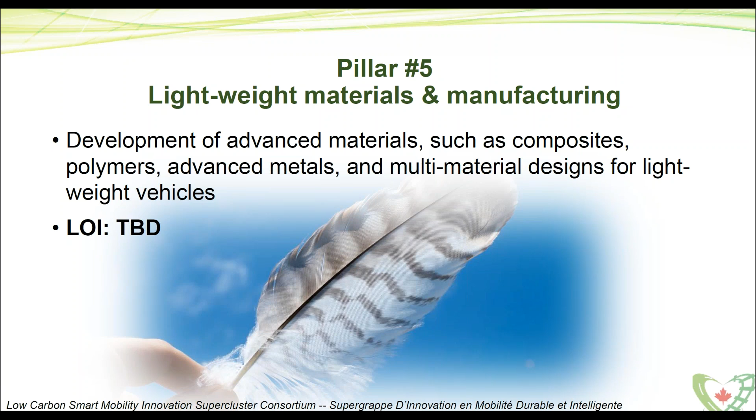Now, for those of you familiar with CUTRIC, what we've been battling at the federal level, in a positive way, is the fragmentation of funding. Currently, we have projects coming through the CUTRIC pipeline in Ontario and Quebec, and some in Alberta and British Columbia as well, that we try to shove through federal programming. And the vast majority of federal programming is not ideally organized or coordinated for low-carbon smart mobility tech.

So what's happened is we've gotten projects that have gotten ASIP funding or SDTC funding, and then they come to the CUTRIC fold for additional funding to grow in a particular provincial landscape. And that works, but it's just not the most efficient way to get projects out the door. It definitely takes more time than it should. And none of these programs is designed for transit applications, including PTIF.

So PTIF, which is public transit infrastructure funding, both phase 1 and what is probably going to be phase 2, were not designed for innovation projects. They were designed for procurement of off-the-shelf commercial products. So your kind of Canadian Tire version of a commercialized product. And yet what we do really is on the integration and innovation side, and the PTIF phase 1 money was not designed to support innovation projects.

So we hit a wall even in Infrastructure Canada, which is presumably dedicated to transit applications. And that's not a surprising wall. I mean, at the end of the day, for the last 15 years, we haven't had a federal mandate for low carbon smart mobility tech on the innovation side. So it's not surprising the federal landscape is fragmented, which has resulted in our lobby effort over the last 2 years.

And at the top, you'll see there that we put in this year into the federal budget, we requested $185 million over 4 years because we had that many projects coming through that needed federal matching, where it was not a perfect NSERC fit or SDTC or ASIP, or it was a combination of the two, or it would have taken way too long to have gone through one of those portals and then have obtained provincial funding.

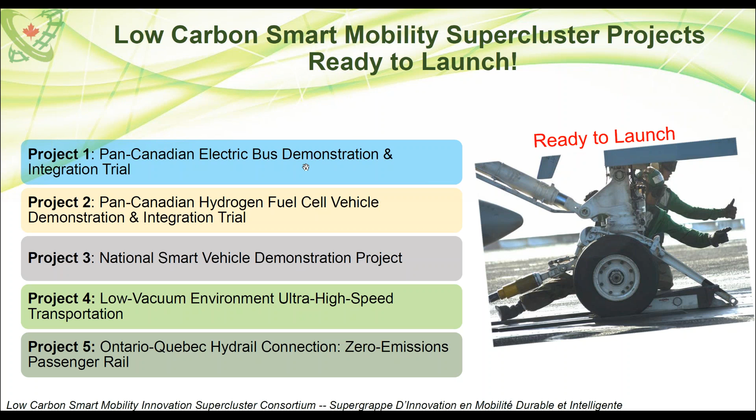It is necessary work, it has to happen, but that is why Consortium is a good structure for this kind of work. A straightforward funding body that receives money from government and then redistributes the money through a call for proposals, let's say, isn't able to do this kind of consortium-based project development work. So consortia really do create the capacity to create knowledge that then allow for the political lobbying that creates the funds for the technology play. Hopefully that makes sense. It's a bit of a convoluted story, but that is the reality of how these projects come about. So I'll take you through the Pan-Canadian Electric Bus Project.

This is a project started about 16 months ago where we reached out to transit agencies and manufacturers to figure out what the problem was. If there's no problems, then everybody would have electric buses right now. There's an obvious environmental check next to it. It fits a lot of mandates around GHG reductions. So why aren't all our transit agencies going to electric buses if there's no problems?

And we found out, of course, there are loads of challenges, and challenges associated with misunderstanding, lack of information, sales pitches versus actual empirical data. So just loads of issues that have to be resolved. Some of them are highlighted here: the need for high uptime, demand charge problems, precision driver problems, renewable energy slumps during the day that make it hard to identify exactly when it's best to collect and harvest energy off the grid for transit, and then of course recycling fees.

So we started off with a project that looked at standardization as the core focal point. And in phase one of our project, we look at standardizing the overhead charger with the bus by virtue of integrating multiple competitive manufacturers. And then we have the integration of energy storage in phase two and the integration of automated charging episodes in phase three. In phase one, these are all the stakeholders that are part of phase one of the trial. This, as I said, is taking 16 months.

We used to have 7 transit agencies involved. And just to speak to the politics of it, 4 transit agencies fell off as we went through municipal councils. So municipal councils sometimes don't believe in climate change. Sometimes they do, but they don't believe in spending money on high-cost projects. Sometimes they do believe in spending money, but they don't want to be the first to absorb this technology.

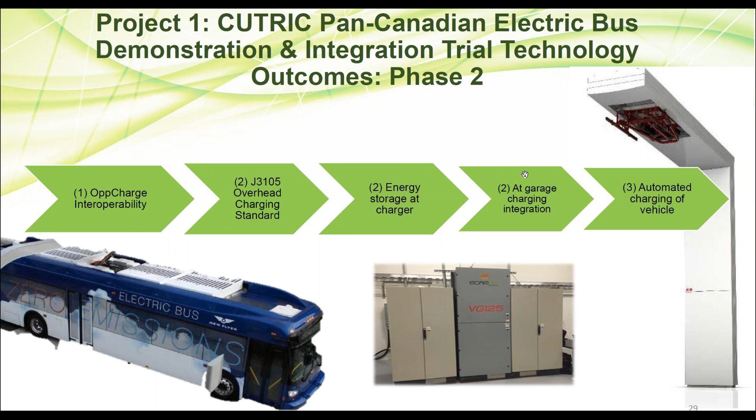With phase 2, these are currently the systems that have identified interest, systems as well as companies. So here are all the utilities that have put up their hand to say they want to co-invest. Here are all the transit agencies that have said they want to absorb these technologies, and now that somebody has been first in phase 1, they're ready to be second. And then, of course, our manufacturers at the table.

In phase 2, an interesting development is that BAE is going to be developing a plug-in hybrid electric powertrain that would plug into the standardized overhead charging system in competition with the TM4-led Canadian collaboration with Cummins as a diesel engine maker for an equivalent powertrain that would be a plug-in hybrid system. And so we have a direct competition between BAE and the TM4 Cummins partnership, which is really exciting for transit agencies as well as manufacturers to be able to look at more than one supplier.

And if you've been playing in the transit domain, you know that it is governed by monopolies, and the electrification of transit is really breaking up those monopolies. So our project will be launching with the goal expected to get to 40 electric and plug-in hybrid electric buses across at least 6 transit jurisdictions, with a likely number of 15 overhead chargers. The energy storage devices will be a combination of battery and potentially flywheel that has yet to be determined through our technical planning sessions.

Just to summarize before I show you the modeling on the electric bus one, we also have some other marquee projects going into the Supercluster bid. One is our hydrogen fuel cell demonstration and integration trial. Technical planning for this is starting on Monday in Winnipeg. We are starting off with a major transit play, trying to get to 30 hydrogen fuel cell buses in at least 2 jurisdictions, likely Ontario and Quebec or Ontario, Manitoba, integrating multiple methods for producing hydrogen, and then patching on top of that in the future a Toyota fuel cell vehicle leasing program.

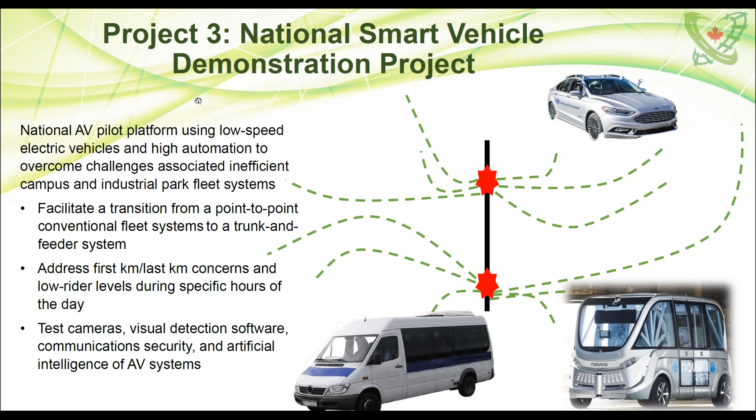Project 3 is a national smart vehicle demo project. Here we went across the country to figure out who's doing what in automated vehicle technology, and we found there are loads of cities trying to do something in autonomous vehicles. Some of them are trying to launch on-road demo pilots, but it's up to a municipal department to try and find the right manufacturers and software providers. In other cases, we have sites that are led by industry, like in Montreal, ABB and FP Innovations, in Ottawa being led by BlackBerry QNX, in Quebec City by Thales.

And so in the cases where it's led by a company, of course, there's the self-interest of that company coming to the forefront in terms of owning IP, and that's good for the local economy, but it's not necessarily good for achieving standardization, not only across municipalities, but across Canada and North America. So again, what we did was we called together a lot of these municipalities, a lot of the companies, over 40 companies that we interviewed and then brought together in a first technical planning session in Toronto.

The second session's in August at PMG test facilities in Blainville in Quebec, and the third technical planning session will be in Edmonton in the fall. And over the course of 10 technical planning sessions, we will get to a full scoping, budget, and set of common deliverables across. The goal right now is 5 municipalities.

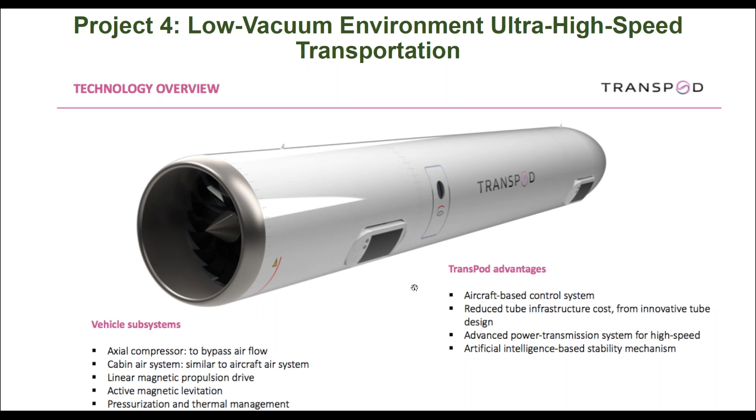In terms of futuristic thinking, we've incorporated into our supercluster bid a Hyperloop competition with Transpod. So this company is coming in at several tens of millions of dollars into our supercluster bid to launch what would be a major infrastructure play for a Hyperloop demonstration in Canada, likely in the Ottawa or in the Ontario-Quebec corridor. And then we've incorporated Hydrail as well, with Hydrogenics being one of the leading companies on that kind of initiative. But of course, we're integrating additional hydrogen-oriented innovators.

So now I'm not going to spend too much time on our national alliances. Just to let you know, we're building up our national alliances with provincially footprinted organizations to make sure we've brought in all the technical capacities across all the fragmented provinces.

And then we do have a First Nations policy where we are looking right now at working with First Nations communities, in particular likely in Thunder Bay and then in British Columbia, in order to be able to offer pilots and demonstrations of safe, secure, low carbon and connected mobility for people, in order to ensure that in particular young people and women have access to safe and secure mobility from First Nations communities into cities and across First Nations communities. And we all know, especially from the news lately, that this is a life and death question.

There are serious sexual violence issues, very serious death issues, and very challenging quality of life issues for a lot of our First Nations colleagues in their communities because of a lack of mobility. And what better place to deliver low-carbon smart mobility tech through a federally funded initiative than through First Nations communities that are willing to work with us to achieve their very pressing local needs and requirements.

Now, there are next steps associated with our supercluster, and if anybody here on the line is interested in that, you're certainly welcome to reach out to us. And there are the contacts if you do want to reach out to us. I want to spend the last couple minutes just showing you some of the modeling, as I promised, around our electric bus project.

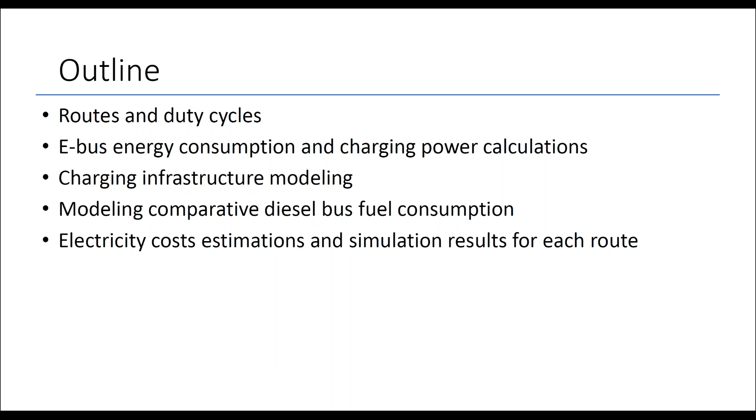And what we're able to show TransLink and the City of Vancouver and BC Hydro and the federal government and the province of British Columbia was really what would it cost and what would it look like to put electric buses on your route according to the best simulation and prediction that we have available to us right now.

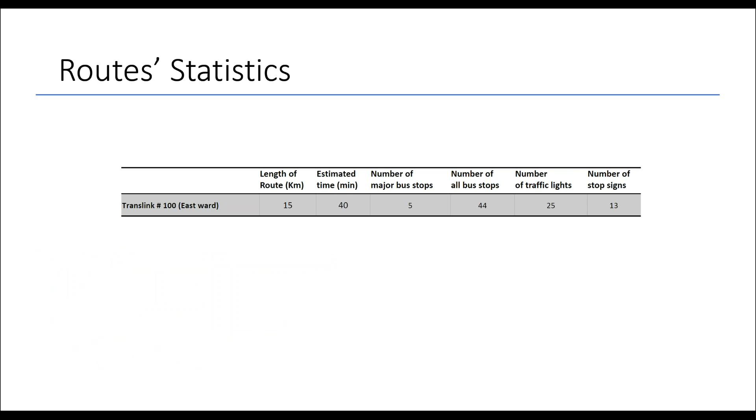And this methodology has been refined and iterated multiple times. We worked on it with the National Research Council and my own research team to really put a lot of brains behind this. So in the TransLink case, if you're familiar with TransLink and Route 100, we looked at the specs associated with the route. We looked at the topography of the routes to determine the energy consumption. We looked at modeling the full topography across all the station stops.

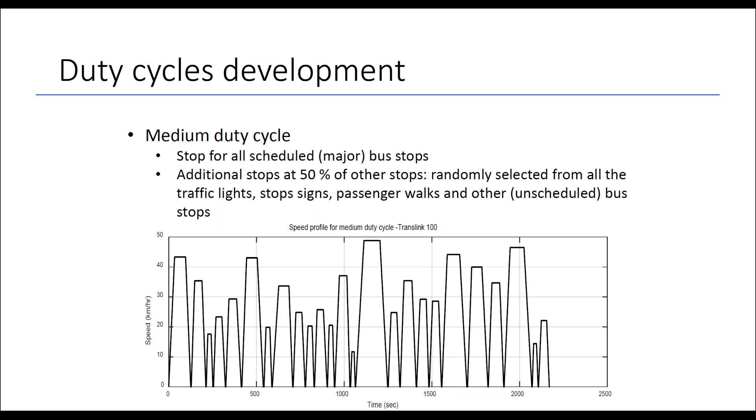We looked at a light duty, a medium duty, and a heavy duty cycle. So light duty cycle is your bus comes out of the garage, it does not stop. It does not pick up passengers, it just drives around the route and comes right back. So a baseline for how much energy do you consume to move that hunk of steel around the route. Medium duty cycle is making 50% of stops, carrying 50% of passengers, 50% of auxiliary loads are on. And heavy duty is of course making all station stops, full auxiliary loads are on, making additional stopping for pedestrians, so much more comparable to a real route.

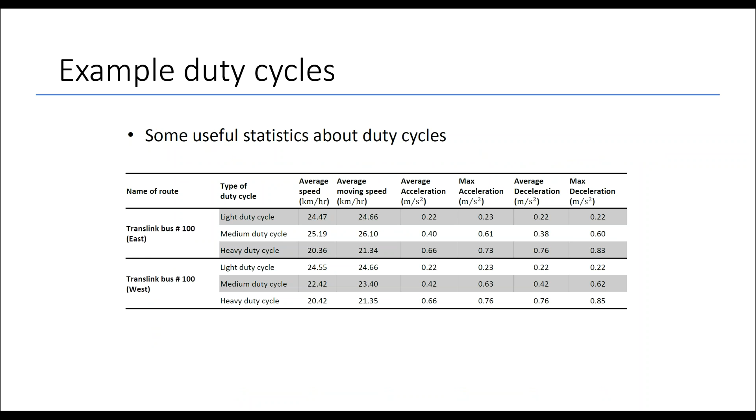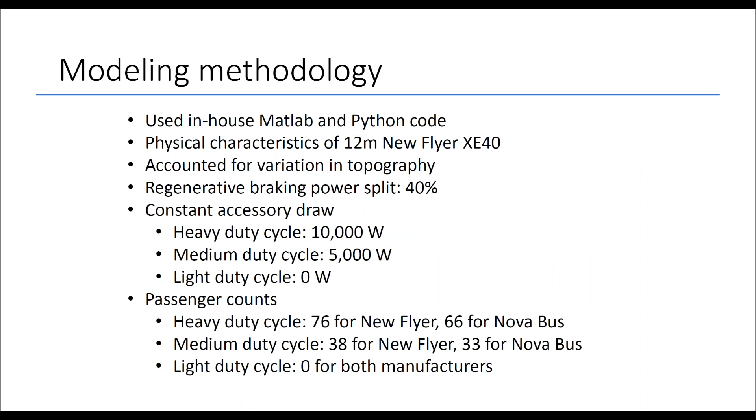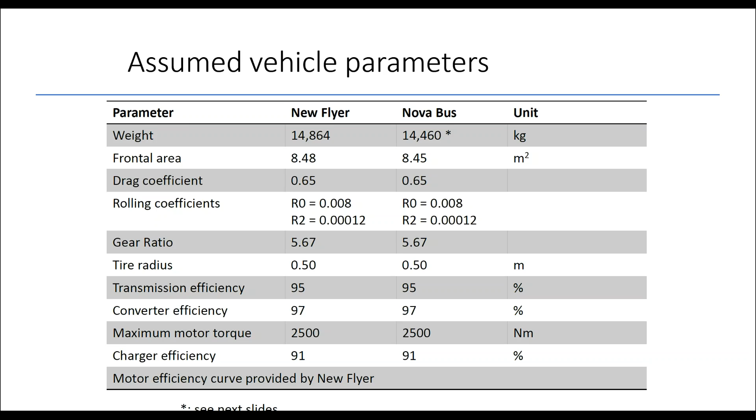Then we took a look at the stats about the duty cycle, of course the speed, the average moving speed, the acceleration, etc. We then took a look at the energy consumption from the utility. So we took a look at a lot of the characteristics associated with the bus itself and with the routes and the assumptions I just explained to you. We took a look at the parameters of the vehicle itself. We had to make some assumptions in here. We took a look at the motor efficiency curves that were provided by our OEM partners. And the real benefit of working with manufacturers in a consortium is they do provide you with a lot of data that you don't get if they are not part of the project. So it allows you to do some fairly accurate modeling.

The other option is it allows you to create an electrification strategy, and as a transit agency say to yourself, well, maybe we do want this bigger battery pack, but rather than stopping to charge every time it does a loop, maybe it only stops to charge every third loop. So there's a series of possibilities technically that come out of this modeling.

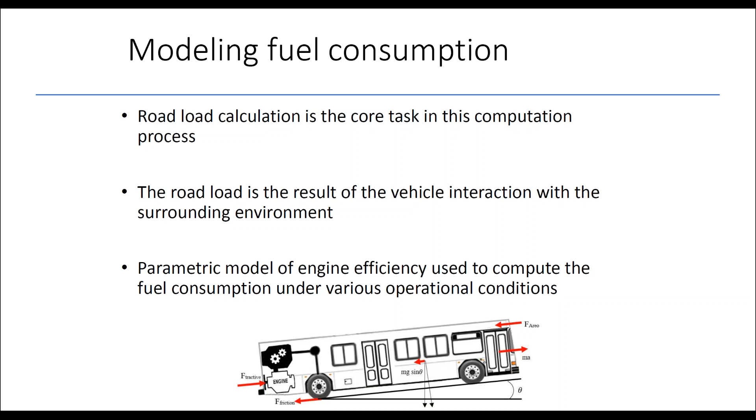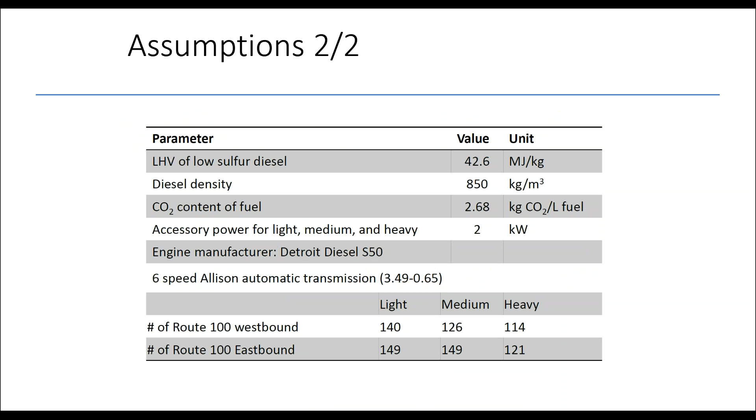Here we did the same thing, the energy demand on a smaller battery pack, similar scenario in terms of charging side. Then we took a look at the fuel consumption compared to a diesel. We had to take a look at engine efficiency to do that. We made a lot of assumptions and grabbed a lot of the information about the diesel engine from Detroit Diesel. We took a look at the parameters for CO2 emissions and GHG emissions. We then modeled out, of course, the duty cycles for GHG emissions, and then we pumped it into a comparative table.

So if you're TransLink, you're able to look at this and say, okay, on Route 100, I know that in a heavy-duty cycle, I'm using about 19 liters of diesel. I know my efficiency is about 61 liters per 100 kilometers. I know my on-road CO2 is about 325,000 kilograms. My diesel cost will vary based on market prices, so I know my cost for this diesel bus is going to be between $120,000 and $160,000 for the year.

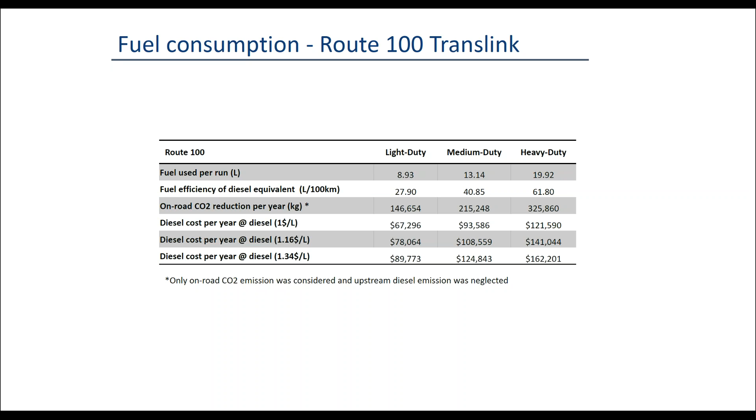This 200 kilowatt-hour bus running around Route 100 for the year is going to cost me about $71,000. In comparison, the diesel cost me $140,000 to $160,000. So the benefit of going electric, even with demand charges, is about $69,000 to $90,000. That's a significant savings. Now, take into account the fact that these vehicle systems and chargers are significantly more expensive. You have to now calculate how many years.

Well, a diesel bus is about $600,000, an electric bus is about $1 million, so you need to make up $400,000, and the charger is anywhere between $700,000 and $1 million. So over an 18-year life cycle, you pretty much have a wash, or it's slightly in favor of electrification if you assume the price of diesel goes up.